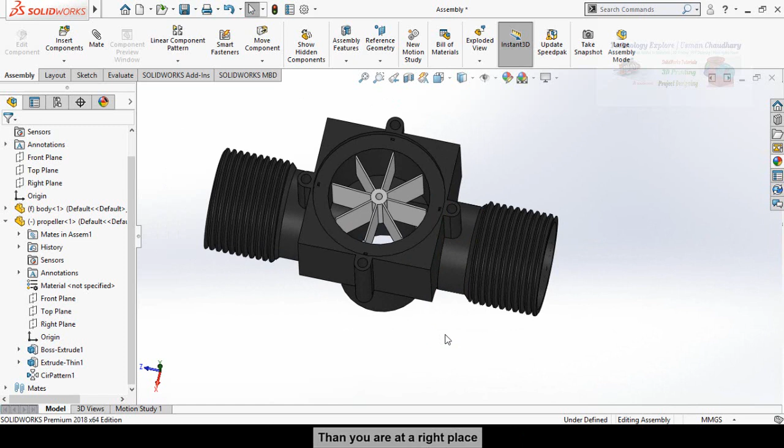My name is Usman Chaudhary and in this video I am going to design this type of water flow sensor in SolidWorks. Basically I had received a text message on my Facebook page.

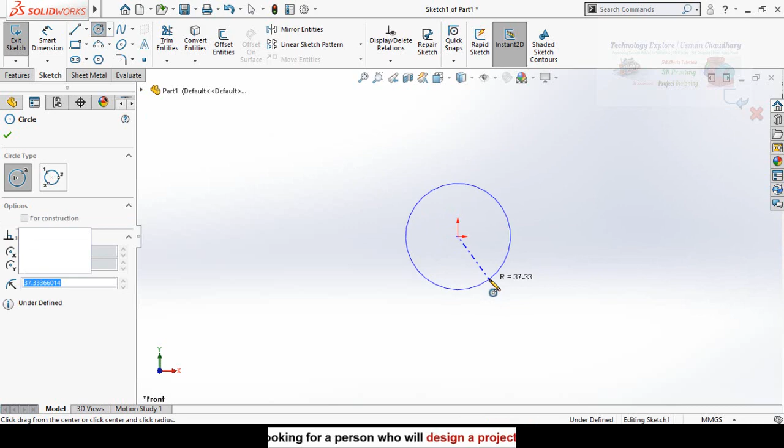Now define it and let's say its diameter is 30 millimeter, then go to features tab and extrude it, up to 80 millimeter or 100 millimeters.

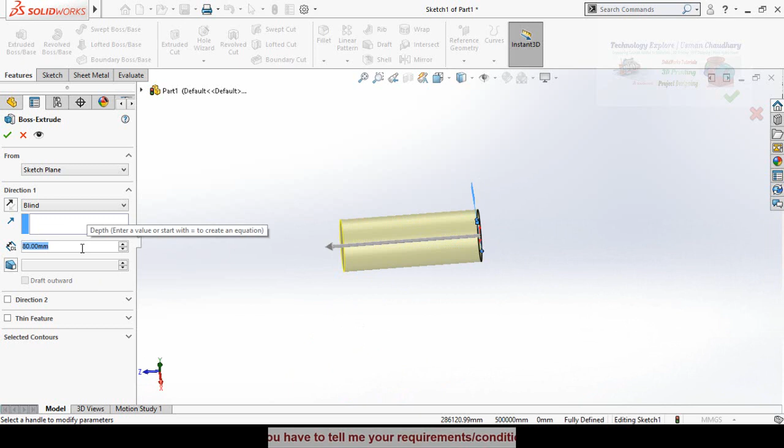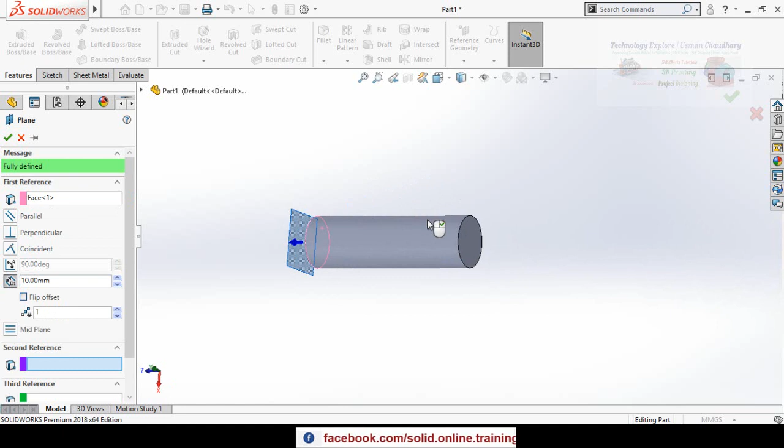Now go to reference geometry and then plane. At this moment I am going to create a plane in the mid of both these faces. First select this face as a first reference, and then select this face as a second reference, then press OK button.

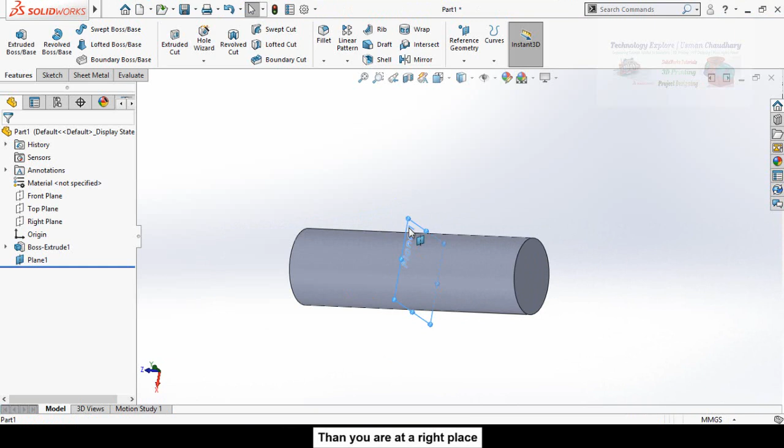So at this time I am going to make this cut. You can see there are many ways to make this type of part or design this part in SolidWorks. I will make it my own way.

So sketch on this plane 1, then make normal to, draw 2 circles, one like this and the other like this. Define the internal circle, the distance between the circle and the solid part, and it should be 2 millimeter.

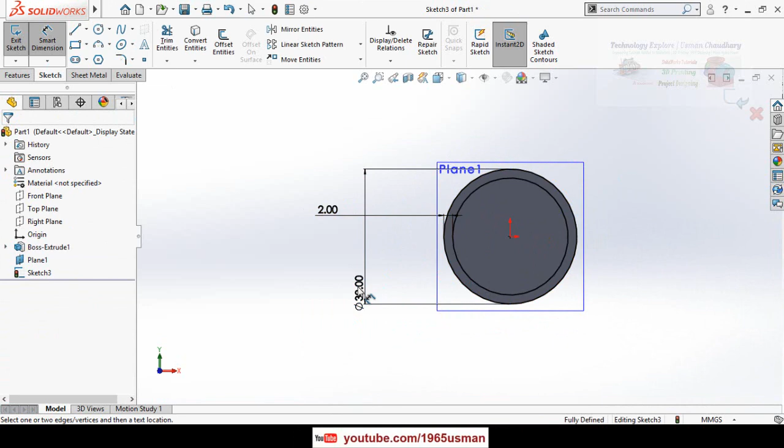Then define the outer circle and it should be greater than the solid part. So instead of 30, type 35 millimeter.

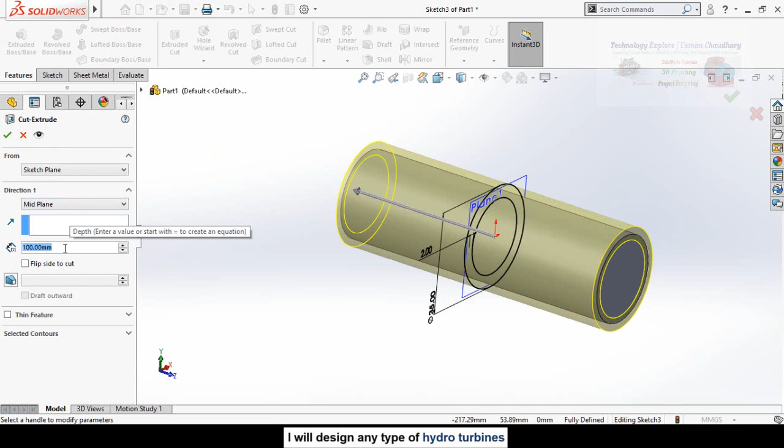Now go to features tab and from here select extruded cut command, drop down these options and select mid plane. Type here the distance and it is 60 millimeter, then press OK button. Now you can hide this plane.

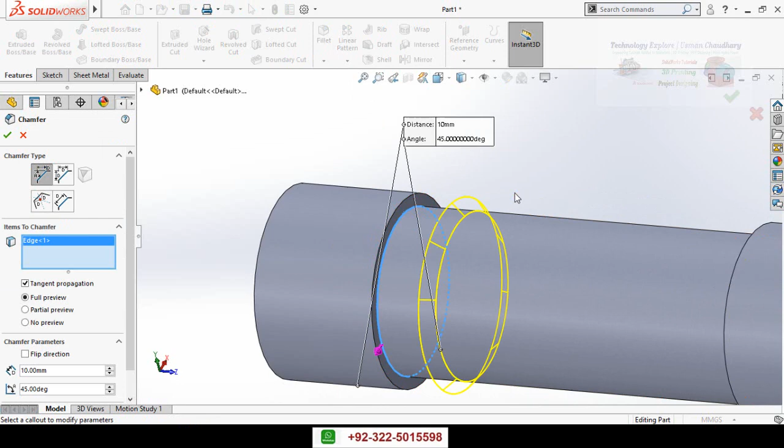As you can see in the picture, there is a chamfer on this corner and also on this corner. So now go to SolidWorks and click on the arrow below the fillet command, and from here select chamfer. Select this corner and this corner. Scroll down and type here the distance, and it should be 3 millimeter or 2 millimeter, then press OK button.

So the next step is that we have to make this box. Initially I will make it a solid part. So again go to SolidWorks.

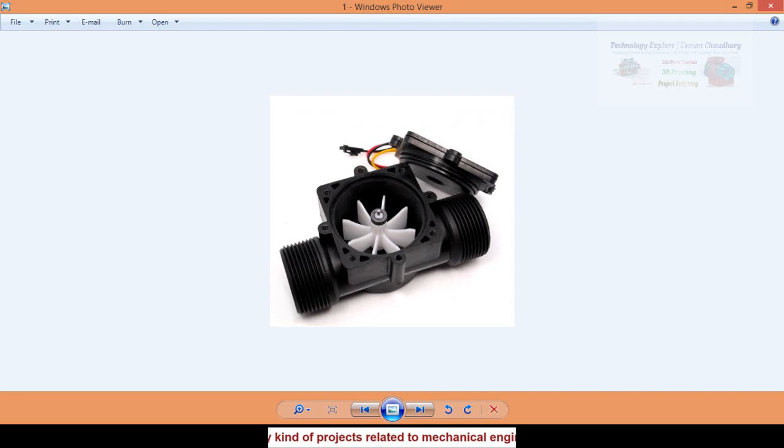From here click on reference geometry and then plane. Drop down or expand this tree and from here select top plane as a first reference, then type here the offset distance, 30 millimeter, and press OK button.

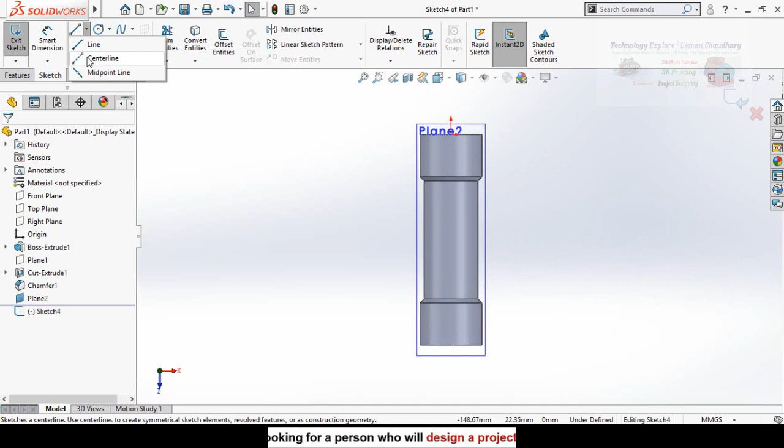Now sketch on this plane 2, then make normal to by pressing Ctrl+8 key from your keyboard. Draw a center line and start it from origin up to this line.

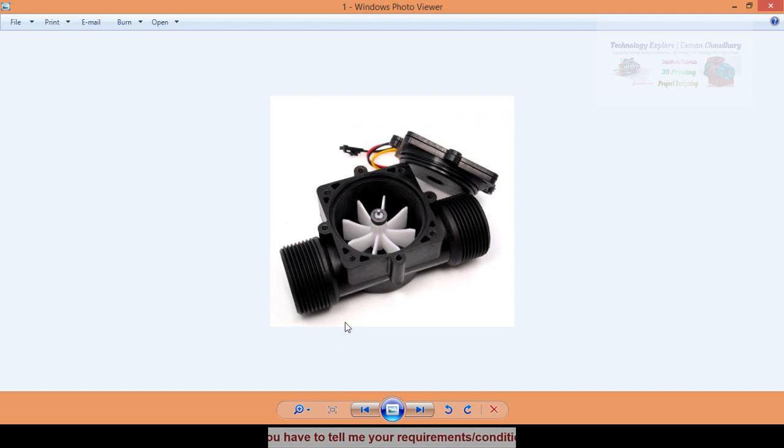Press escape button. Now click on the arrow in front of the rectangle command and from here select center rectangle. Start it from this midpoint like this. So as we can see in the picture, all these lines are equal, so it is a square.

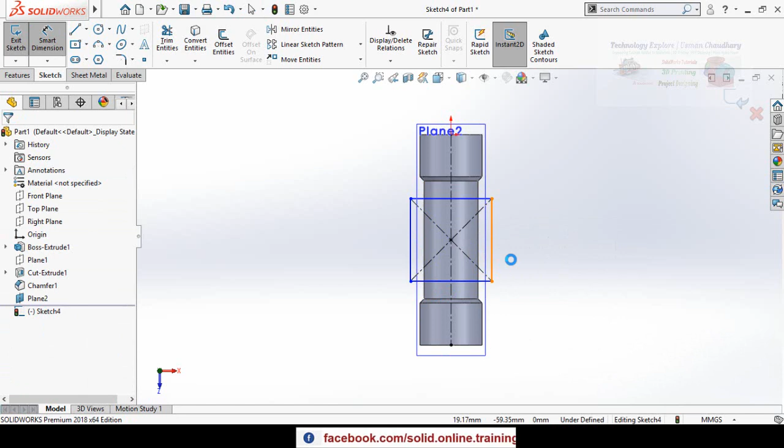Again go to SolidWorks, press and hold Ctrl key and select both of these lines, make their relation equal. Now again define this line, 40 millimeter. So you can see our sketch is now fully defined.

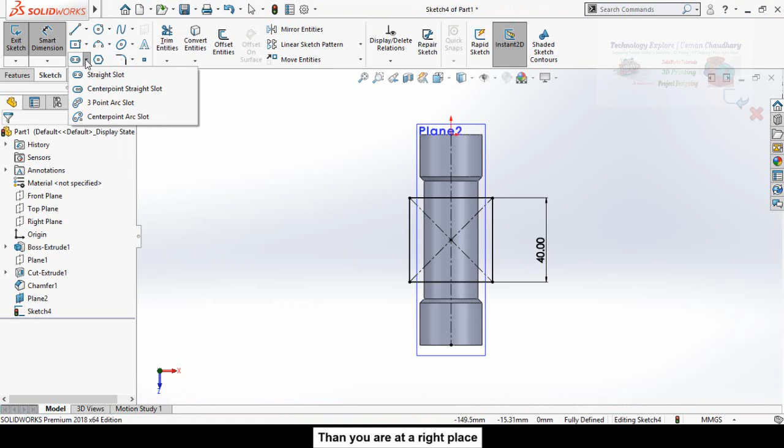Now we have to make these slots on all four sides. So for that, select straight slot, zoom in, and draw slot like this. Similar slot on this side, again on this side, also for this side.

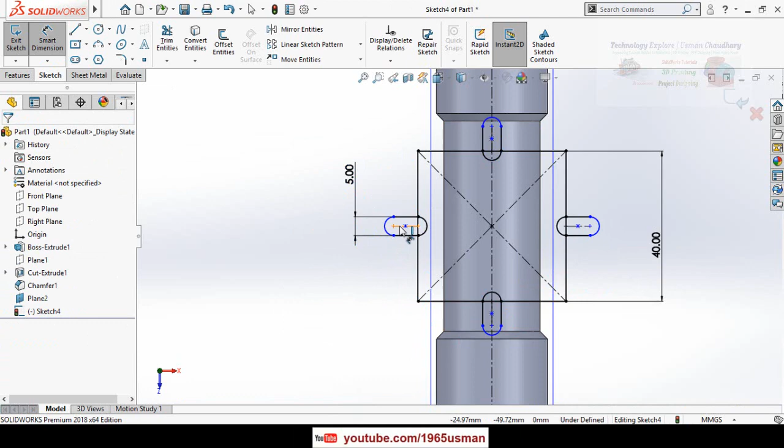Now press escape button. Select all the slots one by one and make their relation equal. Then define them as 5 millimeter. This distance, 3 millimeter or 2 millimeter. Now select trim entities command and trim like this.

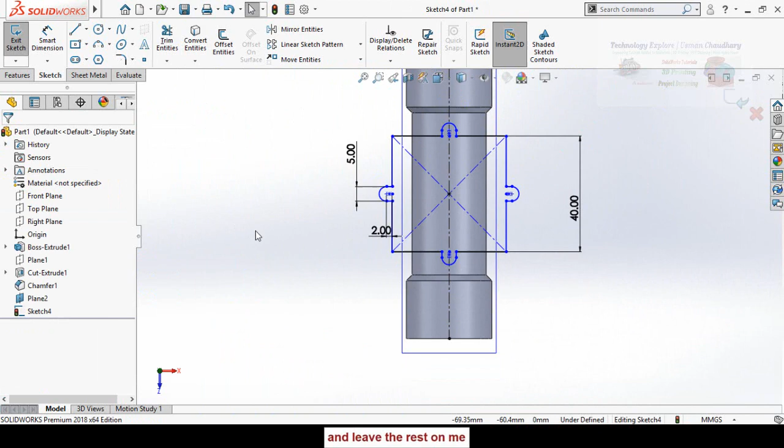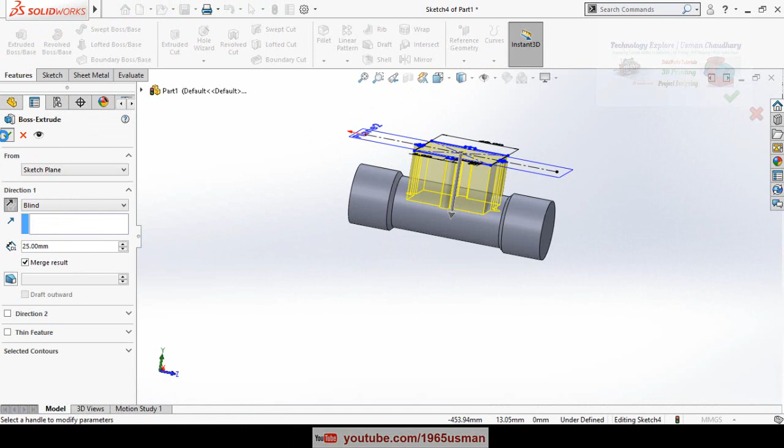Now press OK button and then go to Features tab and from here select Extruded Boss Base command. Reverse the direction by pressing this button and type here the extrusion length to 25 millimeter. Click on this plane 2 and then hide it.

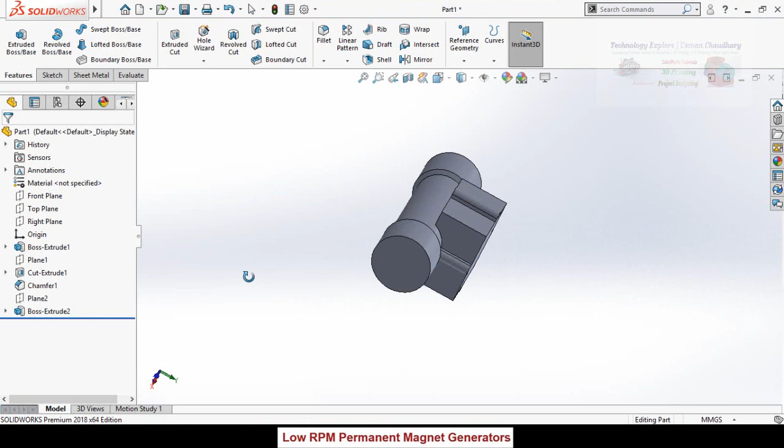So similarly, we have to make another plane on this side parallel to top plane. For that, click on reference geometry and then select plane. Expand this tree and then select top plane as a first reference. Flip offset and the offset distance is 30 millimeter. Then press OK button.

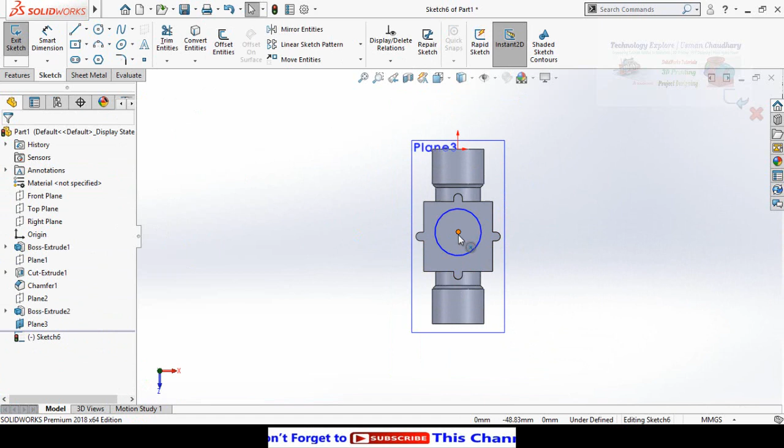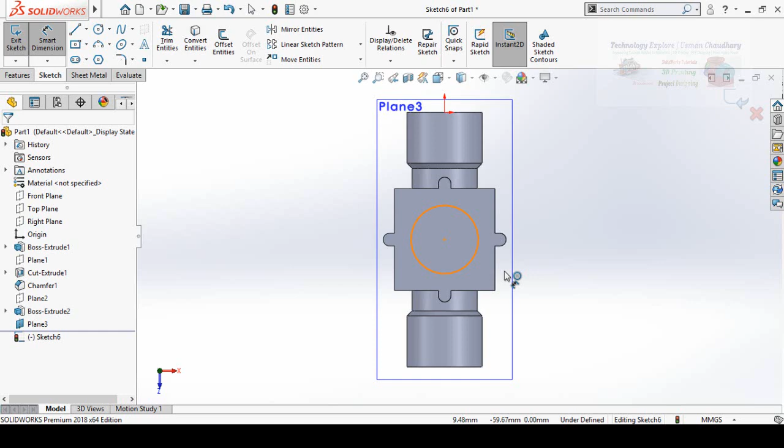So now sketch on this plane 3, make Normal To and then draw a circle like this. Press escape button and then select this center point and the origin, make their relation vertical. Again select this center point and then this center point, make their relation horizontal. Now define the diameter of the circle and it is 26 millimeter.

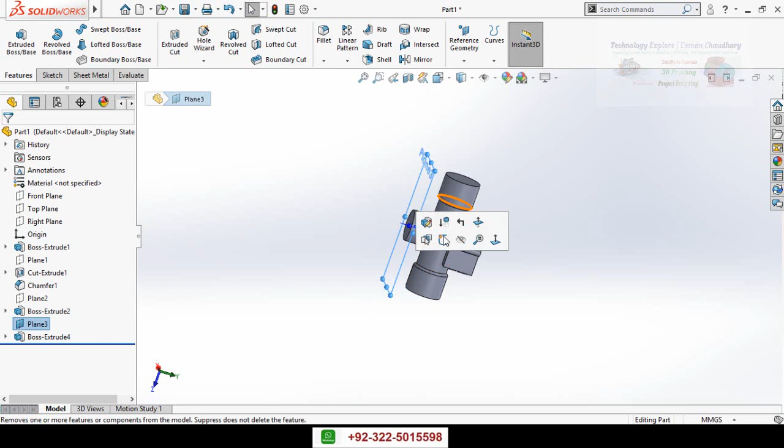So now we have to extrude it. Go to Features tab and then select Extruded Boss Base command. Double click on this face and then press OK button. Hide this plane 3.

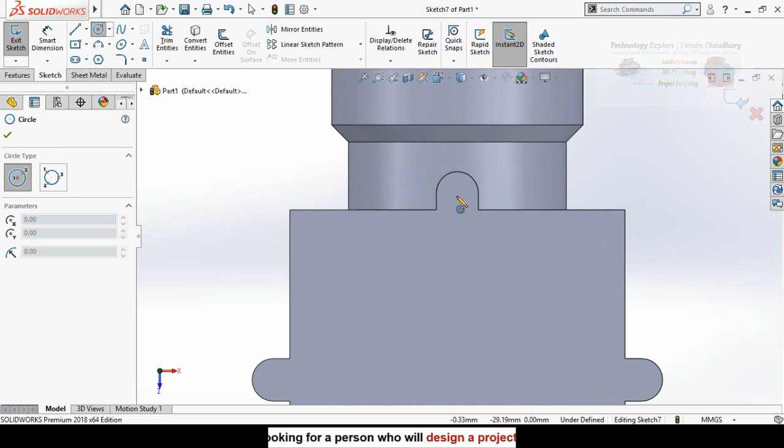So now we have to make holes, these holes. For that, click on this face and then sketch on it. Make normal 2 and then draw circles like this.

Press escape button and then select all these 4 circles, make their relation equal. Then define the diameter 3 mm. Go to Features tab and then select Extruded Cut command. Now double click on this face and then press OK button.

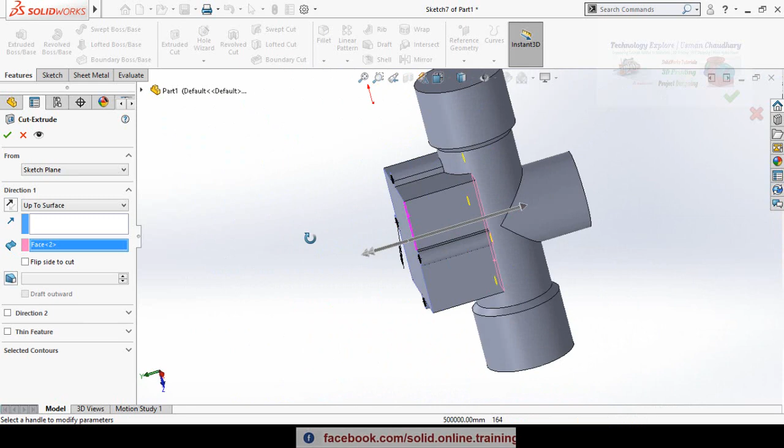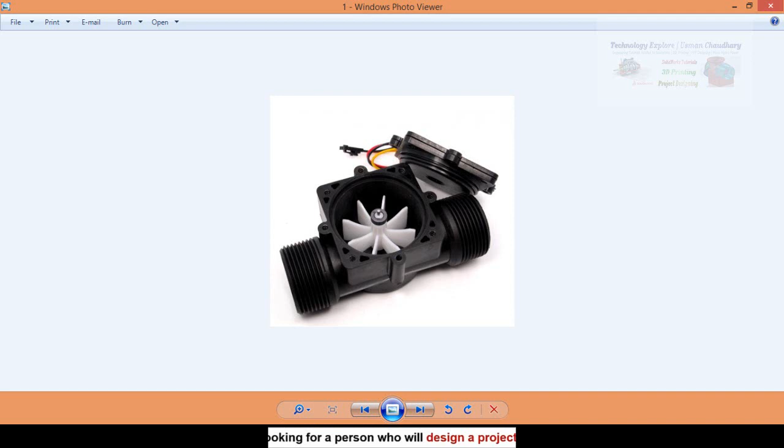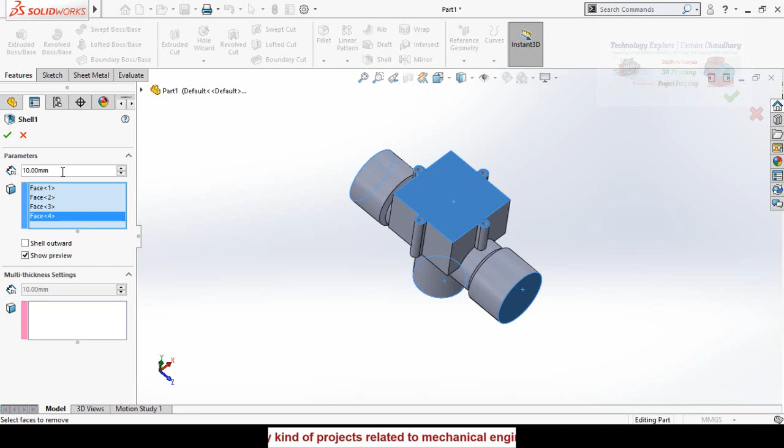So next step is that we have to make this part hollow from inside, just like this. For that, click on Shell command here, then select all these faces one by one, and then select or check this box, show preview. Here is the shell thickness and it should be 3 millimeters or 2 millimeter. Now press OK button.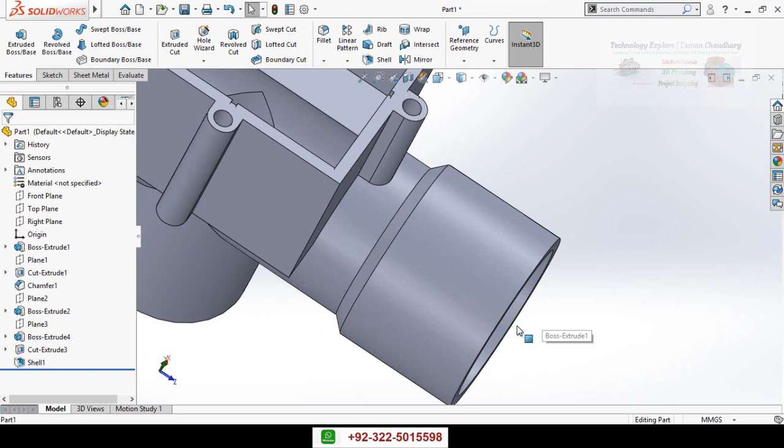So next step is that we have to cut threads on both of these sides. For that, sketch on this face, make normal to by pressing Ctrl+8 key and then select this circular edge. Then in the sketch tab, select Convert Entities command.

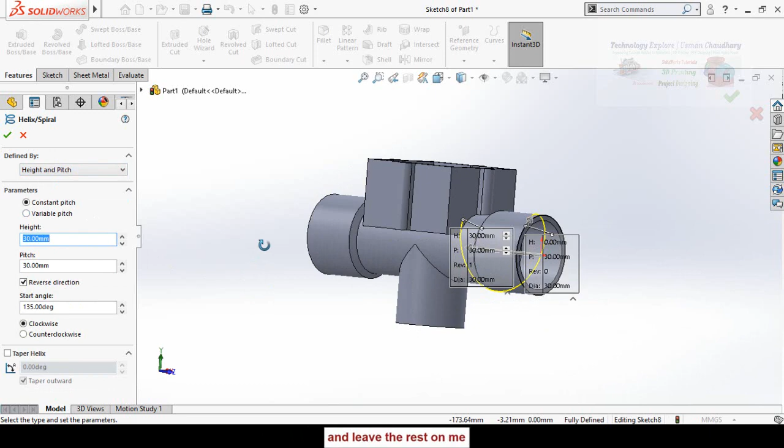Go to Features tab and from here select Curves, select Helix and Spiral. Reverse the direction by checking this box, and from here define by drop down this option, and from here select height and pitch. Type here height 25 millimeter and pitch 2. Then press OK button.

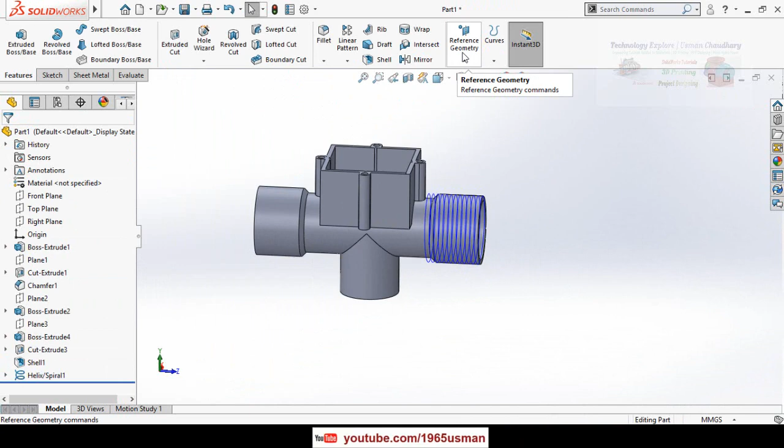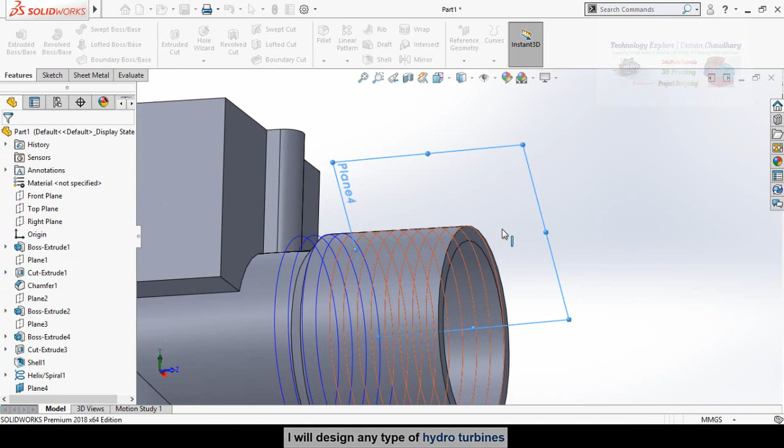Again select reference geometry and from here select plane. Select this helix as a first reference and this end point of the helix as a second reference. Press OK button. Now sketch on this plane and then make normal to,

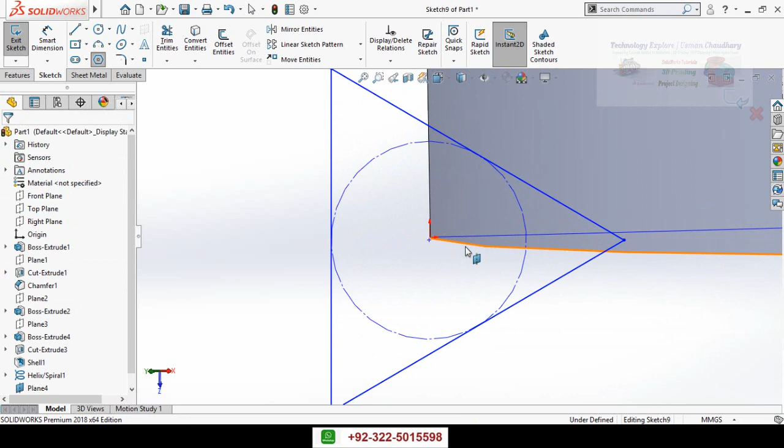zoom in, and from here select polygon. Number of sides are 3 and draw it on the origin like this. Now zoom in and drag this center point on the origin. Now define this size is 2.3 millimeter. Then press this button to save and exit from sketch mode.

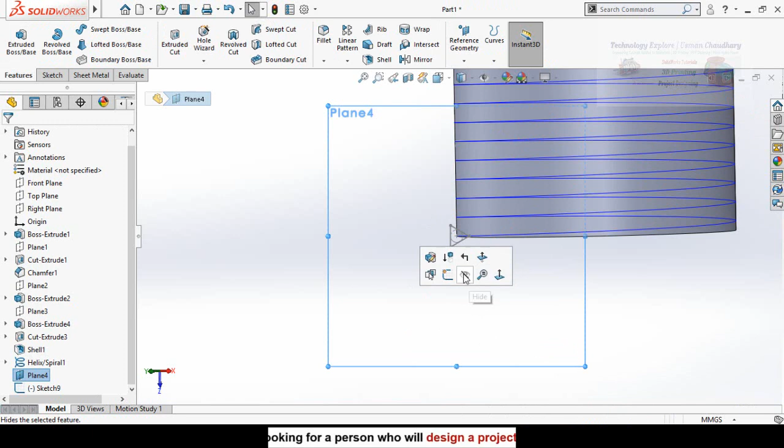Hide this plane 4. Go to Features tab and in the Features tab select Swept Cut command. Select this triangle as a profile and the helix as a path. Then press OK button. Hide this helix. So you can see we had threads cut it on this side.

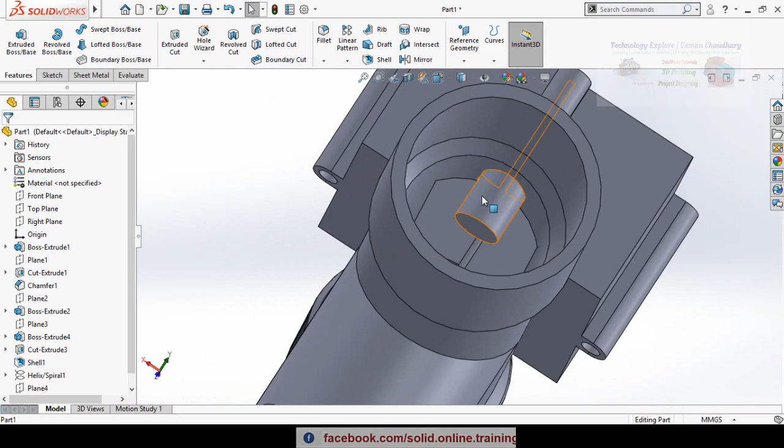So now we have to cut threads on this side, and also we have to cut this extra material. So first of all we have to cut threads and then we will remove the extra material. So sketch on this face and then normal to select this circle, and from here select convert entities.

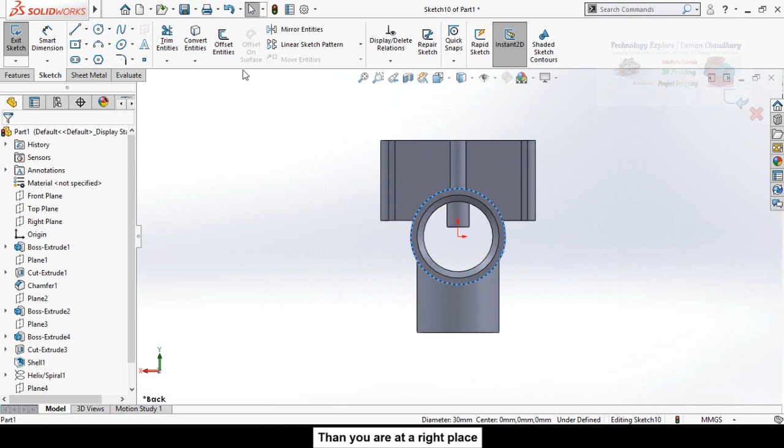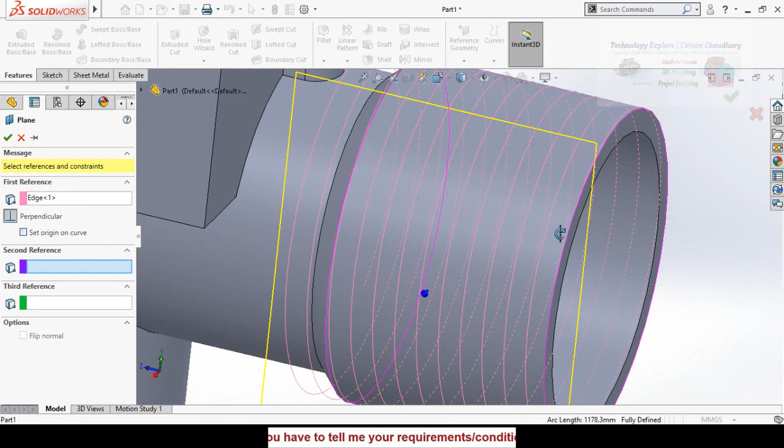Go to features tab, and from here curves select helix and spiral. So leave the setting as it is and press OK button. Again select reference geometry and then plane. Select this helix and this end point of the helix as a second reference. Press OK button.

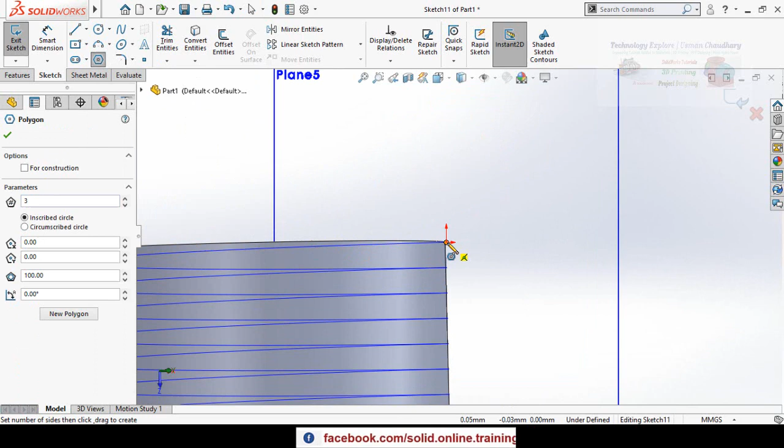Now sketch on this plane, make normal to, and draw triangle by using this polygon command. Sides are 3 on the origin, like this. Define it 2.3 millimeter. Save and exit from sketch mode.

From features tab, select swept cut command. Select this triangle as a profile and this helix as a path. Then press OK button. Now hide this plane 5. Also hide the helix.

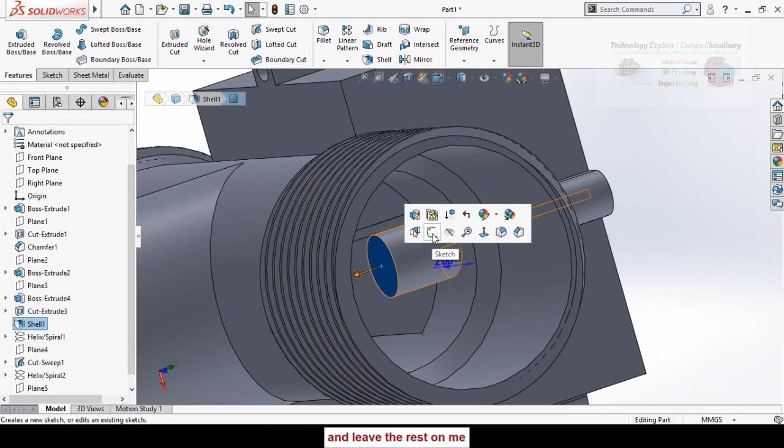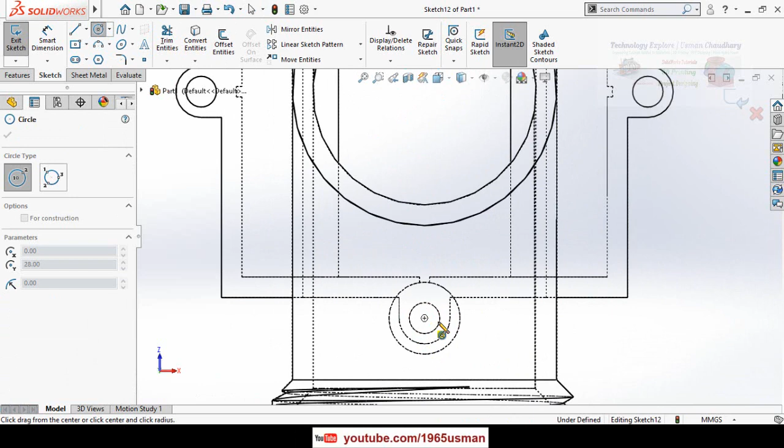Now click on this face and then sketch on it. Make normal to by pressing Ctrl+8 key. Then from here change the shades, and from here select circle and draw it on this center point. Also one circle on this center point, like this. Now you can change the shades again.

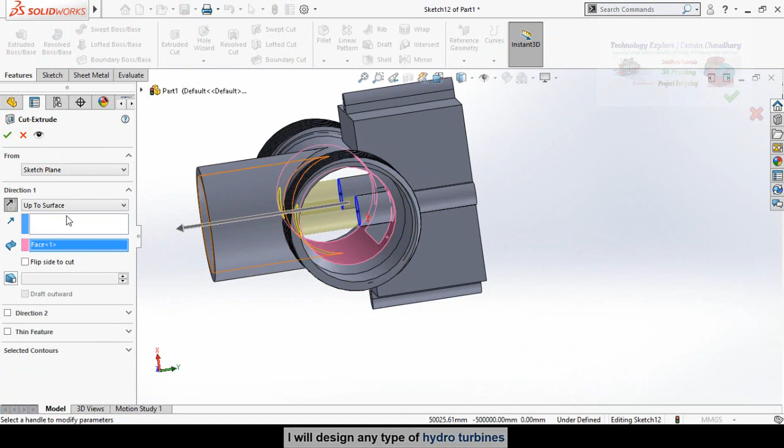Then go to features tab and from here select extruded cut command. Double click on this face. So as you can see, the extruded cut direction is in this side. We have to reverse the direction by pressing this button and then press OK button.

So next step is that we have to make this part like this.

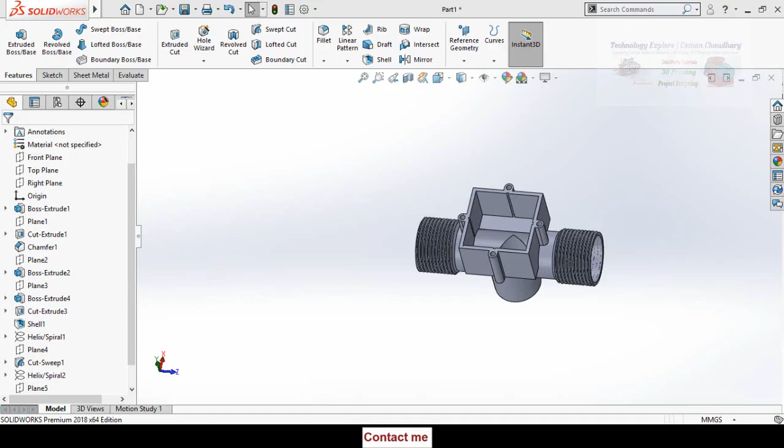Sketch on this face, make normal to, and then draw a circle on this center point, like this. Press escape button. From here select rectangle, corner rectangle, and draw it from this point up to this point. Define the diameter of circle as 25 millimeter.

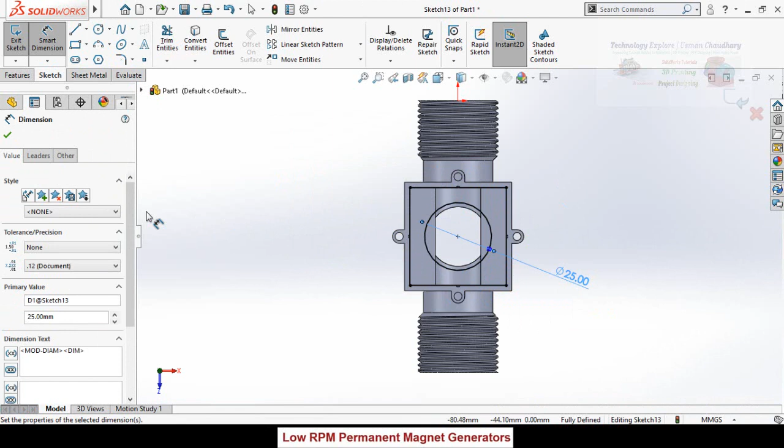Press OK button and then go to features tab. From here select extruded boss base command. Then double click on this face. Press OK button.

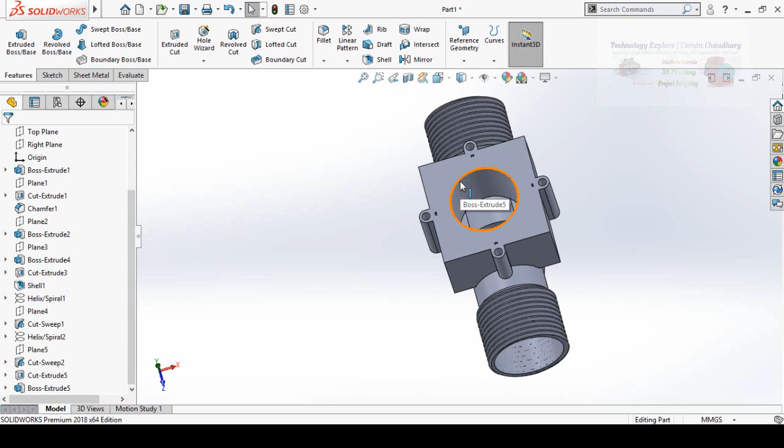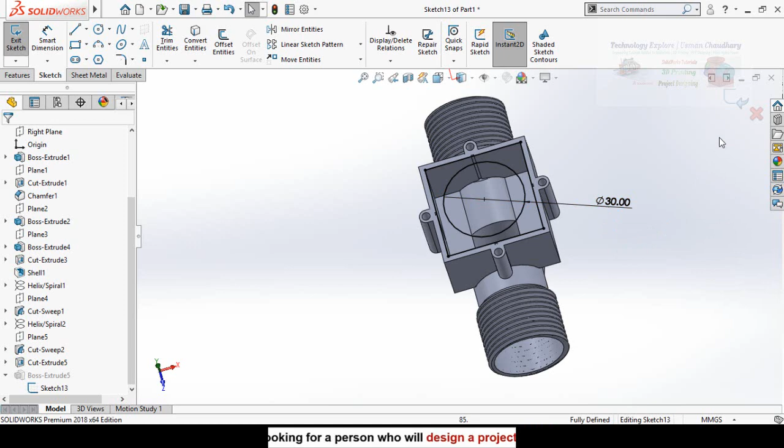Now I think we have to increase the diameter of this circle. For that, on the left side expand the boss extrude 5, and from here click on this sketch 13 and edit sketch. Instead of 25, type here 30 millimeter. So now you can see we have created the internal circle of this diameter.

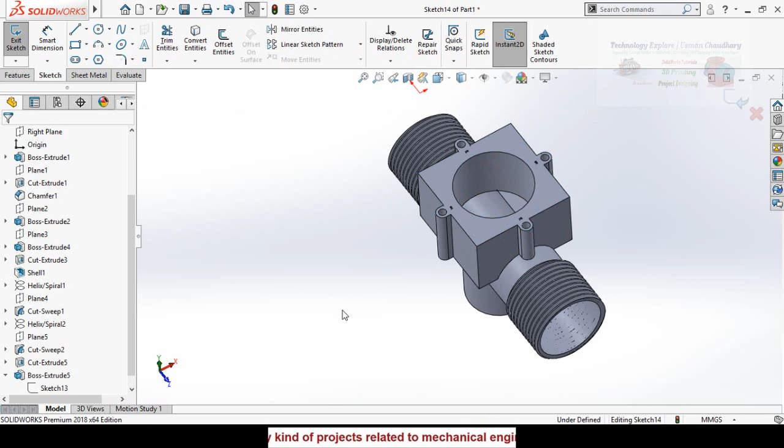Now we have to make a small cut for this seat. Again go to Sketch and sketch on this face, make normal to, and draw another circle on this center point, like this. Now define the diameter of this circle as 39 millimeter. Then go to features tab and select extruded cut command. Type here the extrusion length 2 millimeter and press OK button.

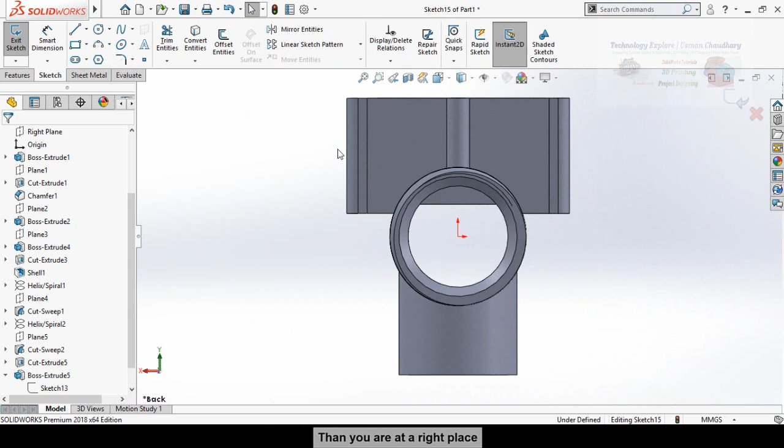Now again sketch on this face, make normal to, and draw a circle like this. Go to Features tab and select Extruded Cut command. Click and drag this arrow like this and press OK button.

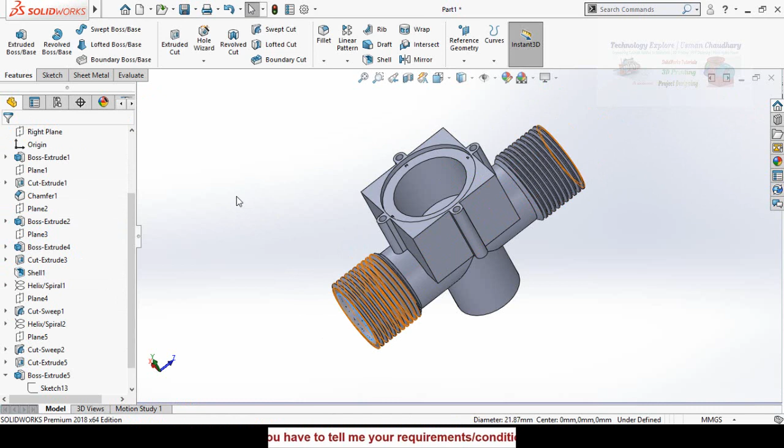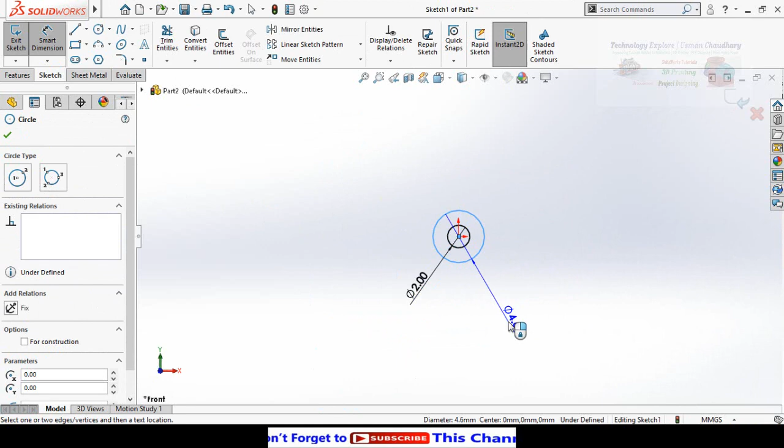So next step is that we have to make the propeller. For that, again start from a new part and then select front plane and sketch on it. Draw two circles, define the diameters of both. So internal circle has the diameter of 2 millimeter and external has 5 millimeter. Go to Features tab and then extrude it up to 5 millimeter and press OK button.

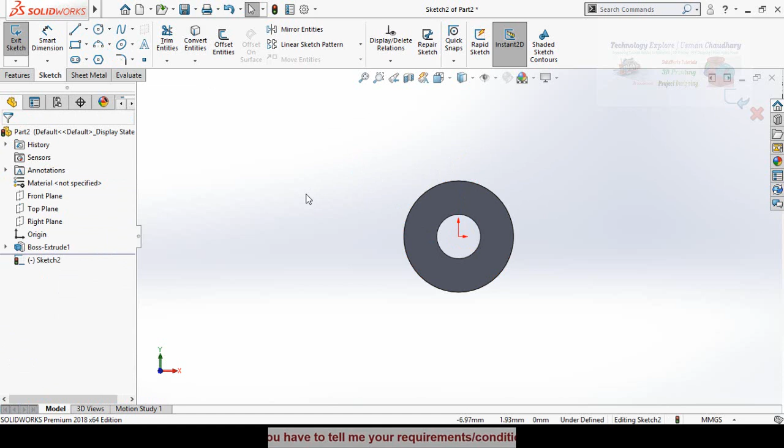Now again select this face and then sketch on it. Make normal to and then draw a line. Start it from this quadrant point. Now define the distance from origin up to this point. This distance is 29 divided by 2.

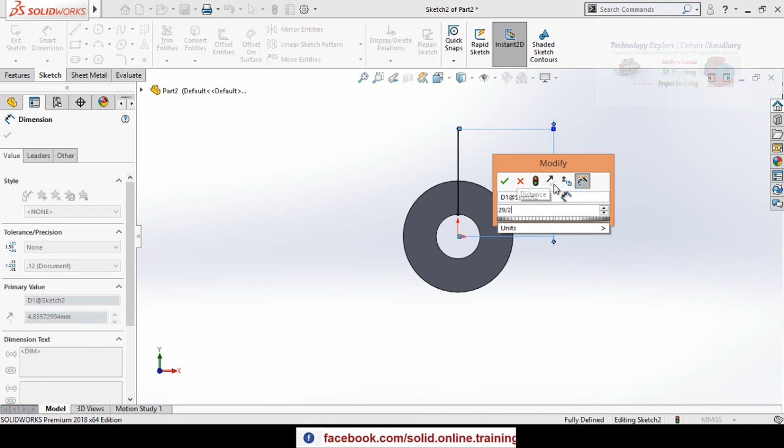Now go to Features tab and select Extruded Boss/Base command. From here you can see the thin feature option is automatically checked. So drop down this option and from here select mid plane. Type here the thickness of the wall, it is 2, or 1 millimeter, or instead of 1 it should be 0.5 millimeter. Now rotate the view and then double click on this face. Then press OK button.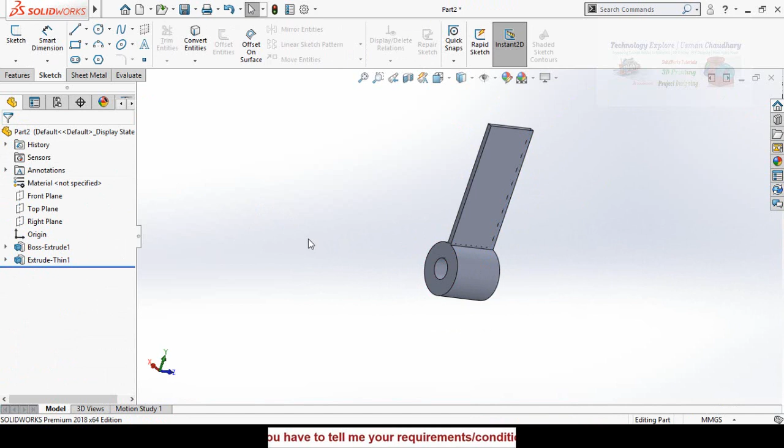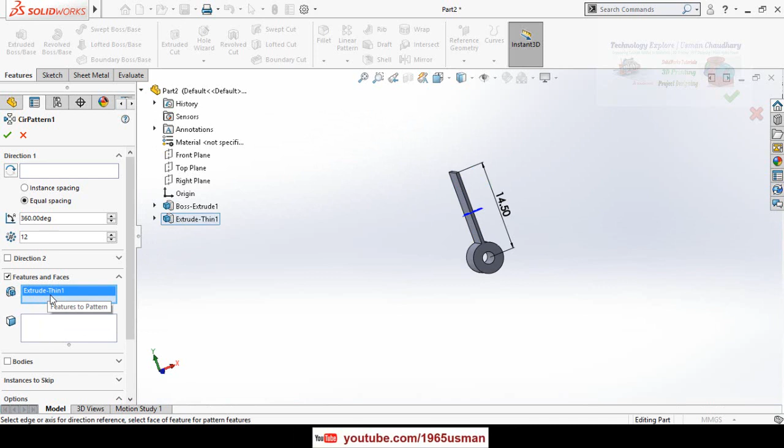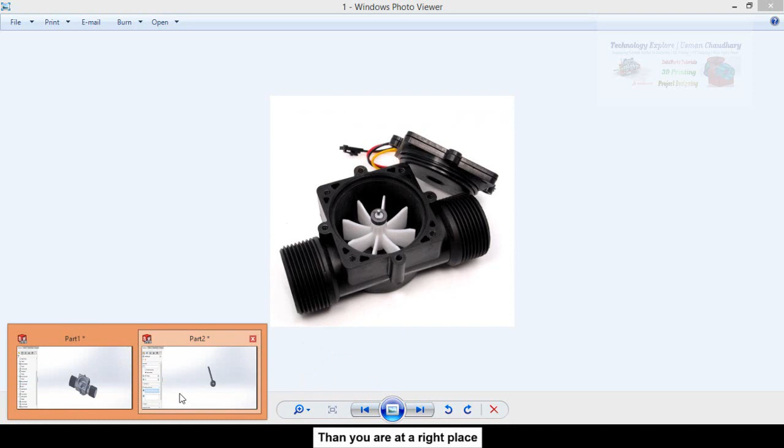Go to Features tab again and from here click on this arrow below the linear pattern and from here select circular pattern. Expand this tree and from here select Extrude Thin 1 as the features and faces to be patterned. Then click on this box pattern axis and select this circle. Now type in the quantity 8 and press OK button.

So propeller has been designed. Save it. Also save this part.

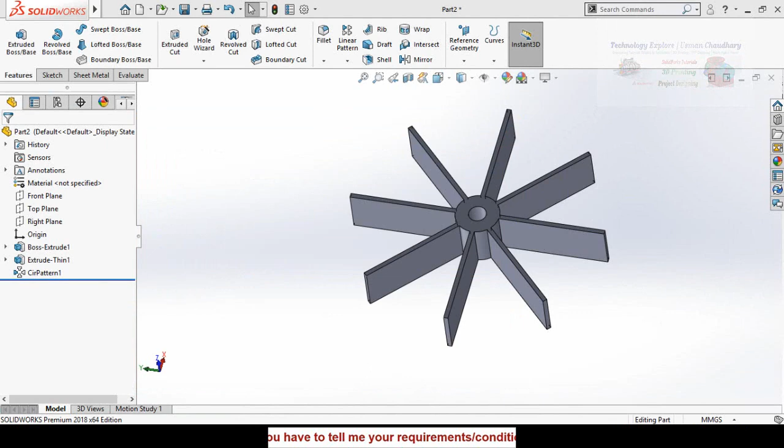Now rotate the view orientation and then select fillet command. Select this line, also this line. Specify the fillet radius, it should be 8 millimeter, and then press OK button.

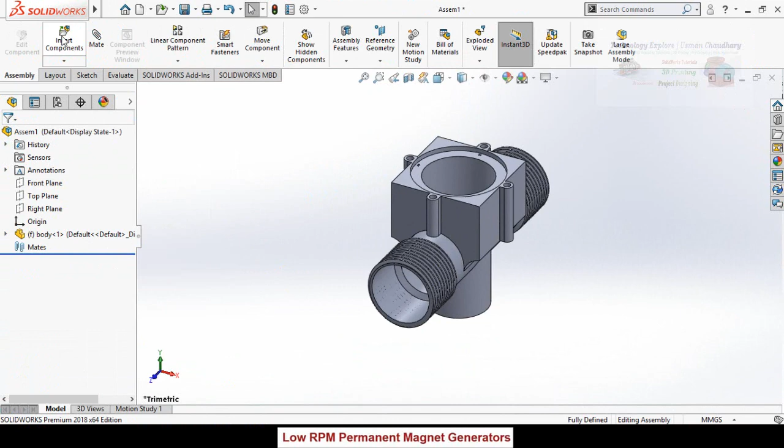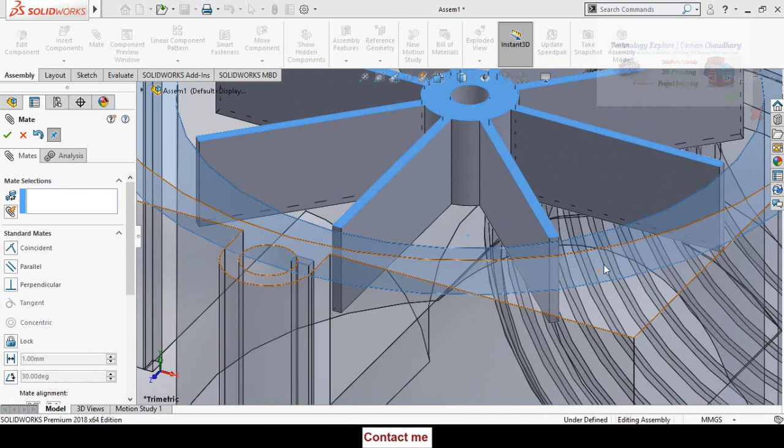Now start from new assembly and then import both of these parts in the assembly. Click on this cylindrical face and then select mate, then select this cylindrical face and press OK button. Now select this face and this face and press OK button. Again press OK button.

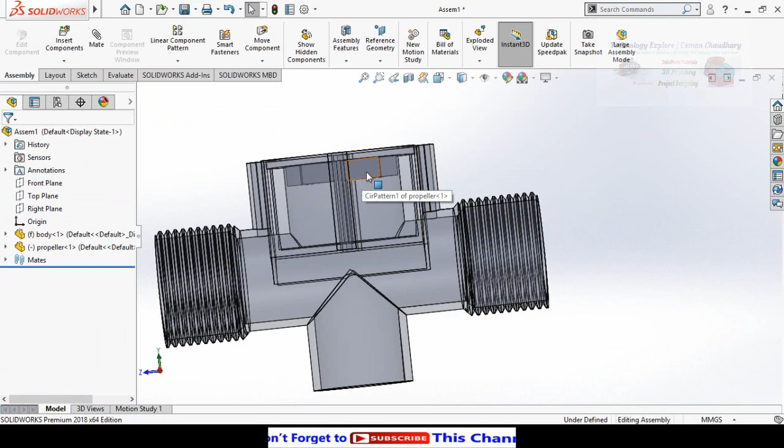Now click on this part and then select change transparency. So we have to increase the length of this propeller. So we can also edit our parts in the assembly. For that, click on the part that you want to edit and then select edit part. Now select save and continue.

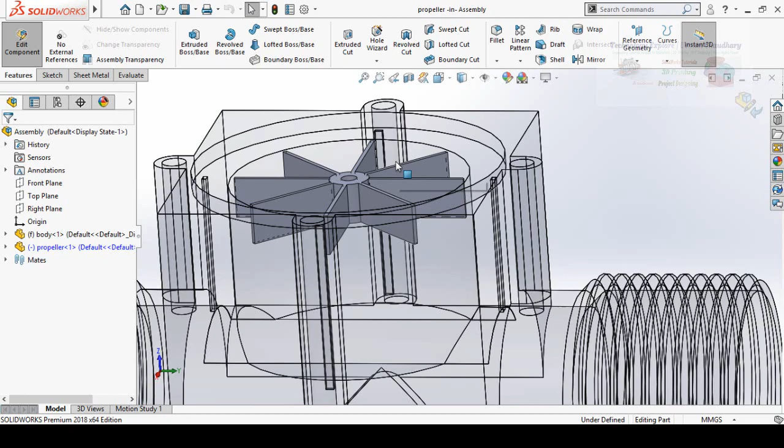Now I want to increase the length of this part, propeller. For that, expand the propeller part from here and then scroll down. Now click on this Boss-Extrude1 and edit feature. Instead of 5 millimeter, type here 15 millimeter and then press OK button. Now press this button to save and exit from part editing mode. Then click on this button rebuild.

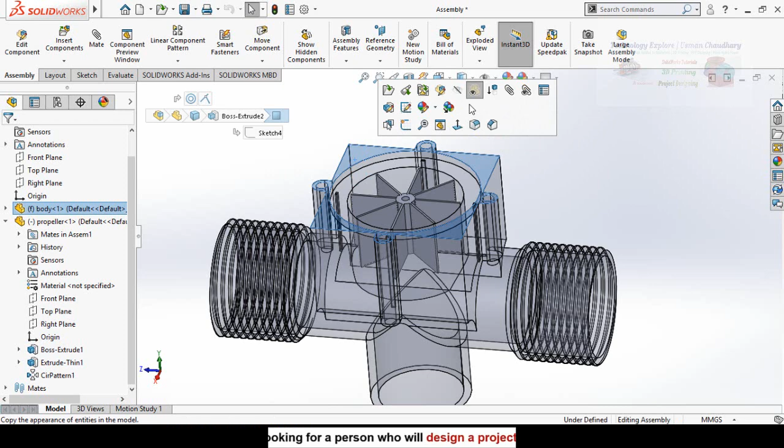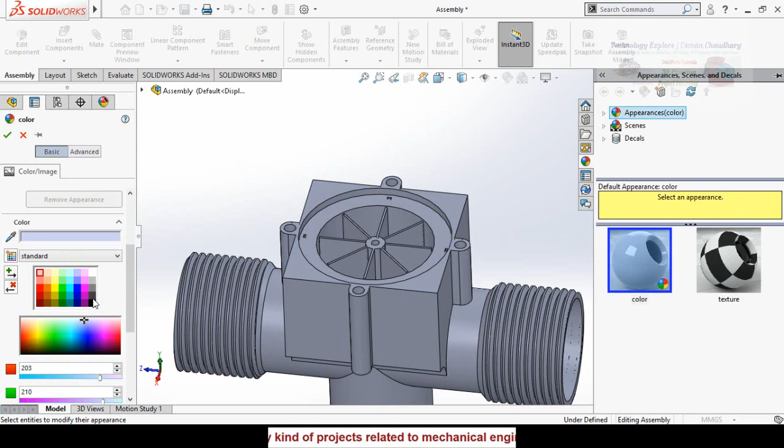Now click on this part and select change transparency. Now we have to change the colors of these parts. So click on the part and then select appearance. From here select body. Select black and press OK button.

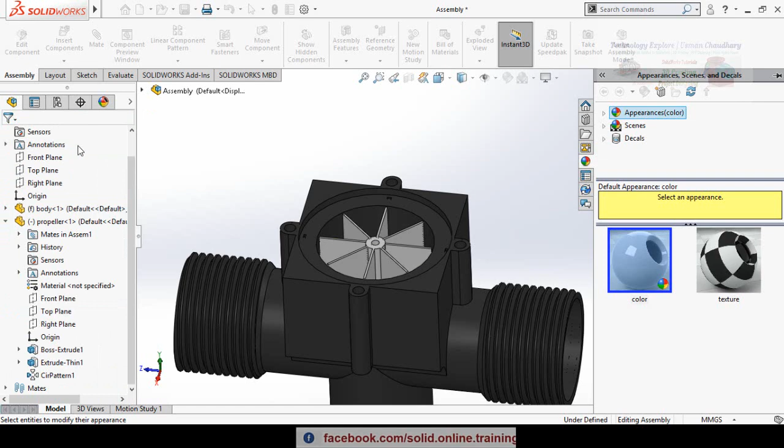Now select this part, propeller, and then select from appearance propeller, select white, and press OK button. You can also rotate this propeller in the assembly.

So this is how we can make this type of part in SolidWorks. I hope you enjoyed and learned from this video.